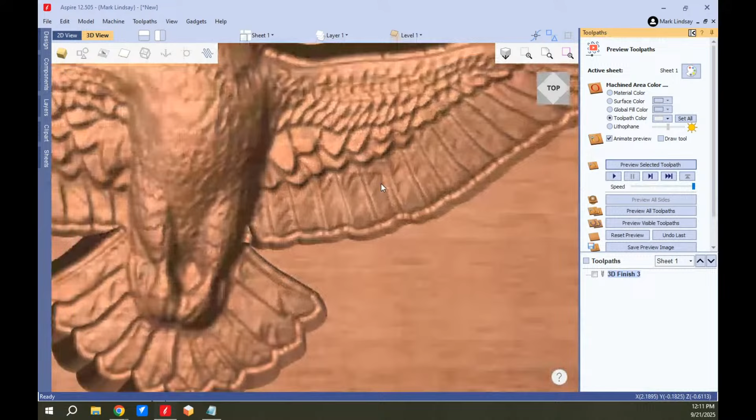All right, we're about there. Okay, we're finished. Now we can zoom in and we can see that tapered ball nose, it's done a fairly good job - it carved to that vector and then stopped.

So now what we need to do is cut this eagle out. We need to go ahead and do a profile toolpath, so for that I have the profile selected. Now I'll click on this. My cut depth is going to be the thickness of my material, and I'm going to use a 1/4 inch end mill because I don't have an 1/8 inch end mill that'll cut 3/4 of an inch deep.

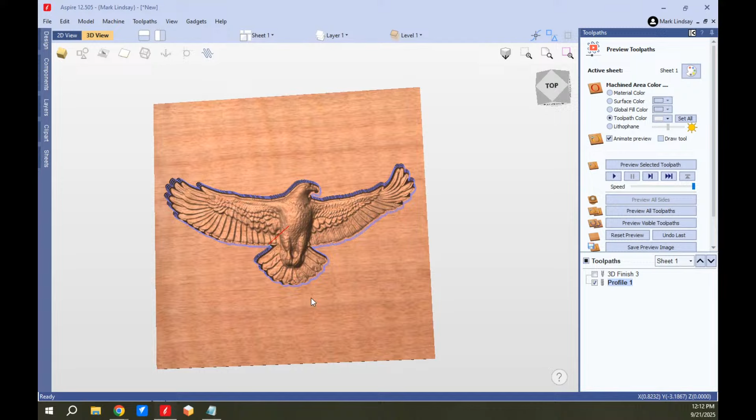And that's just for this demonstration. I'm not going to worry about any allowance offset or anything like that. I'm not going to do a separate last pass. I'm not going to add tabs. I'm just going to come down here and calculate it. All right, so we're all set to go. We'll go ahead and preview that.

And now I'll click on the waste material. Now let me zoom in here and we'll see what we have going on.

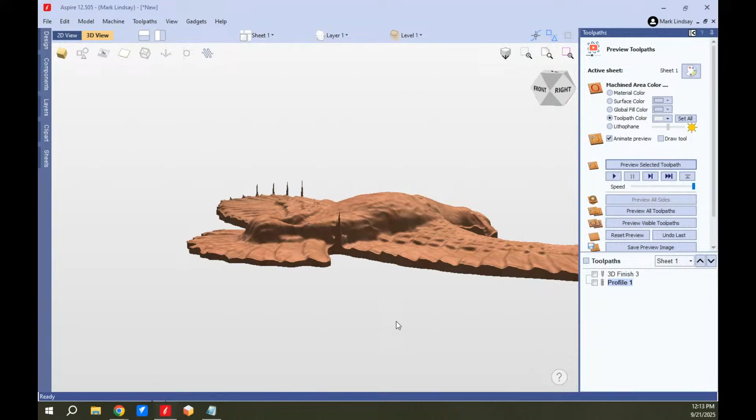What's happened here is that tapered ball nose has carved just to the edge of the model where that boundary vector was. And you can see we've also left a little bit of flash here, we've got some spikes pointing up. Now, some of that may have to do with the fact that I used an 1/8 inch ball nose to cut the model and a 1/4 inch bit to cut out the model. You can see here there's a little spot here that didn't get cut out. But also, if you look around here on the edges, you can see a little bit of flash, just a little bit of a ridge around the model that looks like it didn't get carved.

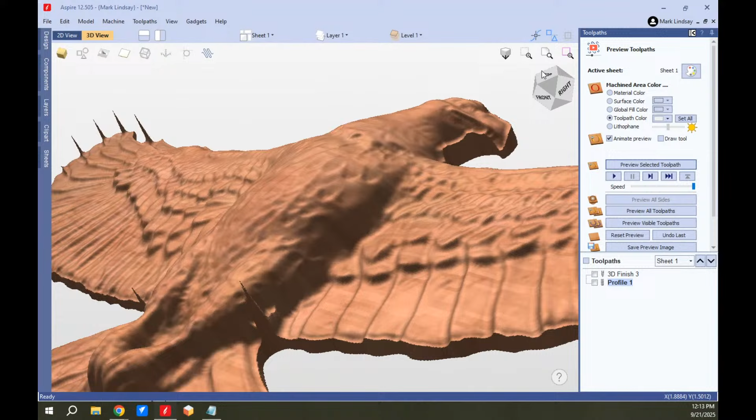So what we'll do, we'll go back to a straight top view, and I'm going to reset the preview. And the way I'm going to clean that up is with a boundary offset in my 3D finishing toolpath.

Now again, 3D roughing toolpath, this works exactly the same way. So let's go back into my 3D finishing toolpath. And right here we have a section called boundary offset. Now what a boundary offset is, it allows the bit to go past this boundary vector just enough to where it's carving all the way to the edge of the model.

So, okay, let's back up for just a second. When the software calculates a toolpath, all of the calculations begin with the center of the bit. All of this is calculated based on the center of that bit.

So it knows with a 1/8 inch tapered ball nose, wherever the center of that bit is, the cutting edge of that bit is half of the diameter of this bit. So it's actually stopping the tip of that bit, the center of that bit, in this case, 1/16 of an inch away from this border. And that's why you're getting that little bit of curved flash right here on the edge, because that's the radius of the bit that's carving this model.

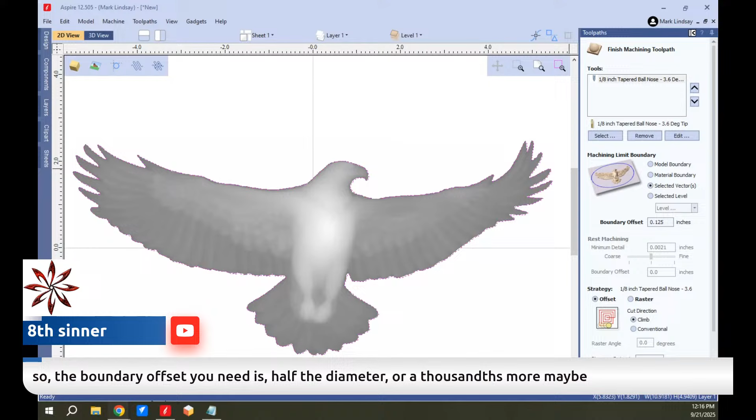The boundary offset is the diameter of the bit you're carving with. So if it's metric, if you're using a 3 millimeter bit, your boundary offset would be 3 millimeters. And again, it doesn't matter if you go offset or raster.

Let me go ahead and calculate this toolpath now that we're using the boundary offset, and we'll preview all of the toolpaths. It's only the 3D toolpath that has been changed and recalculated.

So that boundary offset is there to allow the bit to go past the edge of the model, past that vector, and allow it to cut the complete edge of the model. And you'll see it is carving, it's already carving wider than it did before.

And now we'll get rid of our waste. And now if I rock this eagle back a little bit, we can see I don't have that sharp, harsh edge anymore. That's all gone. I don't have those spikes sticking up. It's nice and clean.

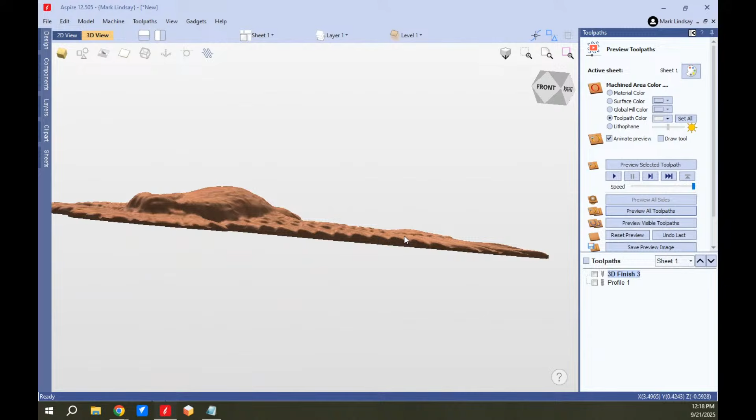That has got a nice smooth look. So...

8th sinner says this only takes effect on the outer edges. Yes, it only takes effect on the outer edges. Let me go back to the top.

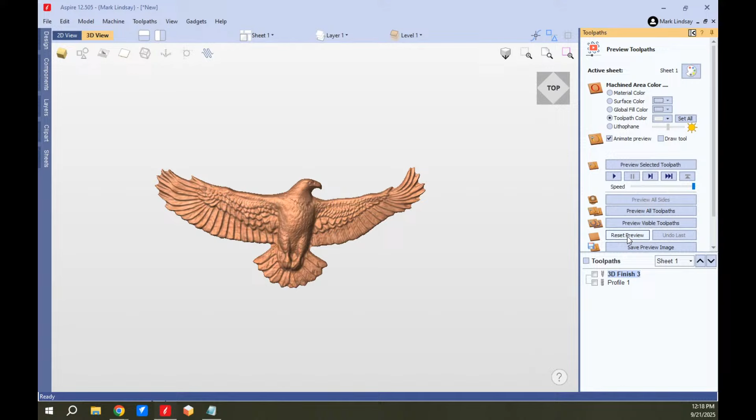I'm going to reset the preview, turn on the vectors here. I'm going to close this. And we can see the vector right here. If we look in the 2D view, we can see the vector. So if I click on this...

It's not going to give me a preview of that. Nope, it's not going to give me a preview of that. Okay, but if I click on the profile, it does give me the preview of the profile.

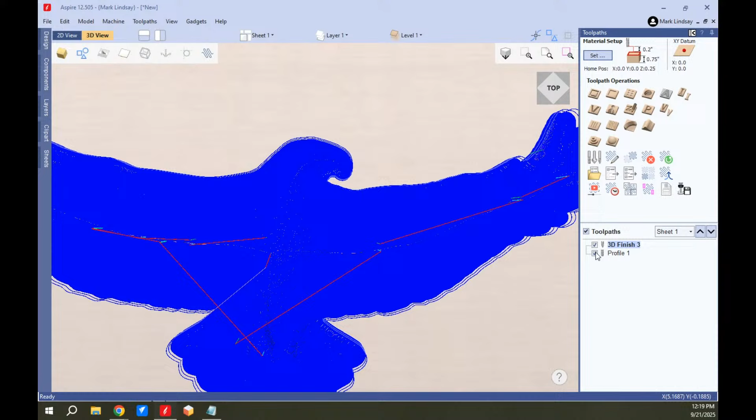Well, anyhow, if I turn on the 3D view, I have the vectors turned on, but you can't see it. Yes, you can, there we go. This is my border right there. That's my boundary. But this blue line out here, that's where the bit is coming to. The bit's going to come out this direction beyond this, allowing it to carve this edge of the model.

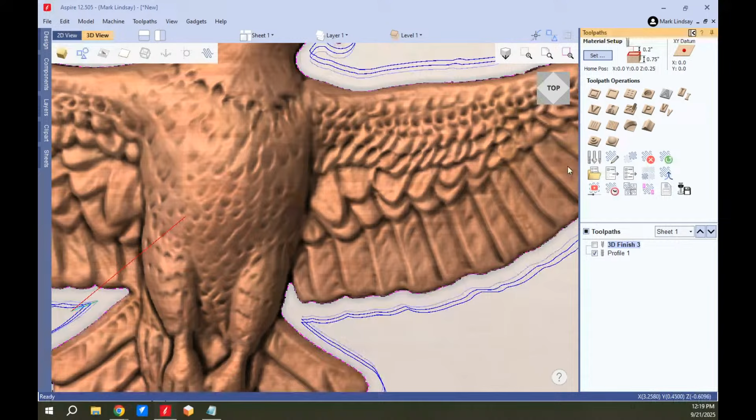So the boundary offset only affects the edges of the model. So that's what the boundary offset is. That's why it's used, that's how it's used.

And remember, it doesn't matter if it's the 3D roughing or the 3D finishing. For example, on the 3D roughing toolpath, I have a 1/4 inch end mill, my boundary offset is a 1/4 inch. On the 3D finishing toolpath, I'm using an 1/8 inch tapered ball nose. My boundary offset is an 1/8 of an inch.

So that is going to take care of all that flash, all those little spikes, and anything left over in a 3D carve. Now this is especially true in a model that is raised. It's less obvious if you're carving a dish, for example.

Let me add a sheet here. I'll add a new sheet, make it the same as this one. Double click to go into this sheet, and let's get into the clip art. And I'll do the eagle in a dish on this sheet. Hold down Shift just to increase the size a little bit from the center. Click off on there, there we go.

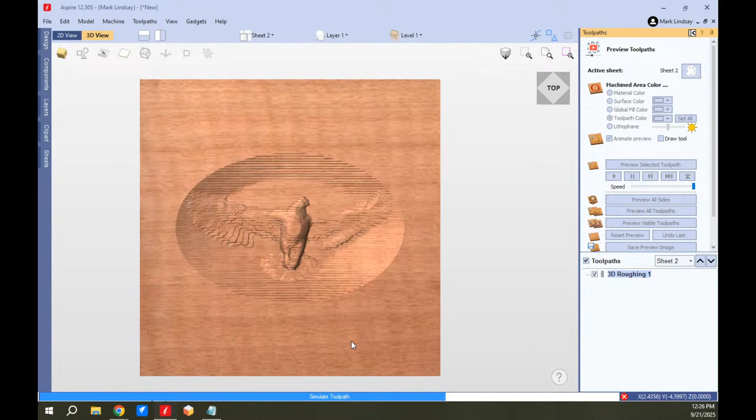And we can see it's taking a little bit more of a roundabout approach, but that's all right, doing it in several passes, just to remove most of the material here.

Okay, there we go. Now, because I didn't go into material setup and recess it 0.01, I have a flat spot in my model. Now that may or may not show up in the finishing toolpath, because I have 40 thousandths of an inch to play with here.

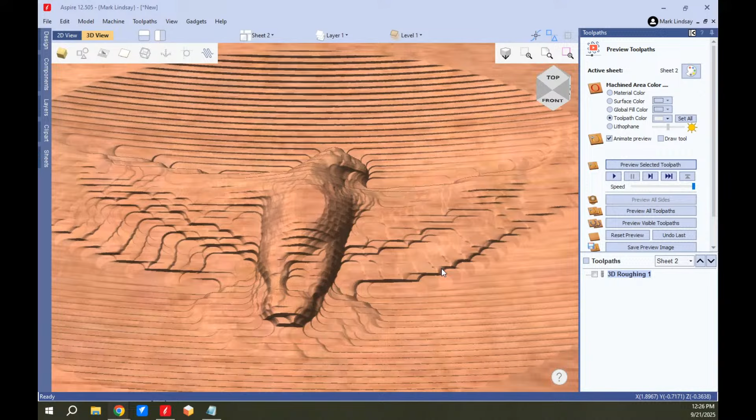Okay, so let's close this. And now we'll create our finishing toolpath using the selected vector with a boundary offset of 1/8 of an inch. And we'll calculate.

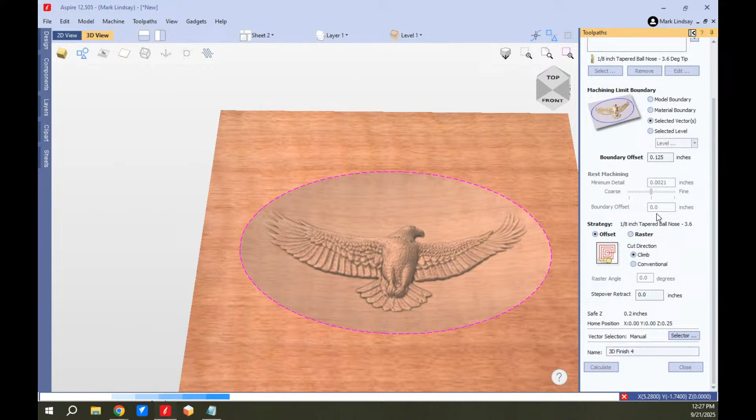Okay, now we see here this is the edge of this dish. But we see the bit's going to come out here as well. Let's take a look at what that means, and we'll preview that toolpath.

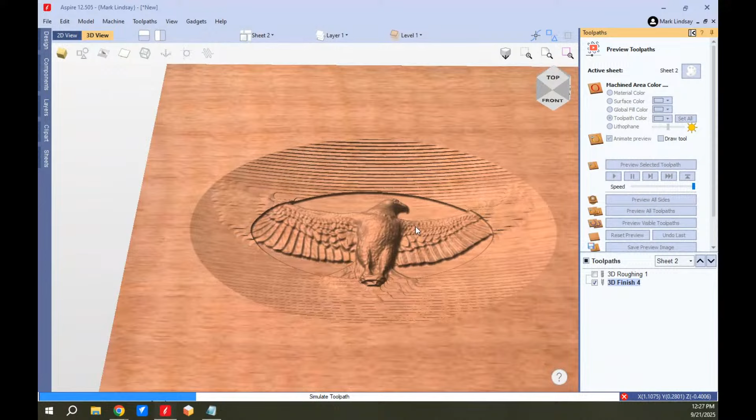And we can see that it's carving the entire thing. My flat spot is gone. But let's pay attention to what happens out here on the edges. The main advantage of using a boundary offset in either a roughing or finishing toolpath is it allows the bit to carve beyond the edge of the model.

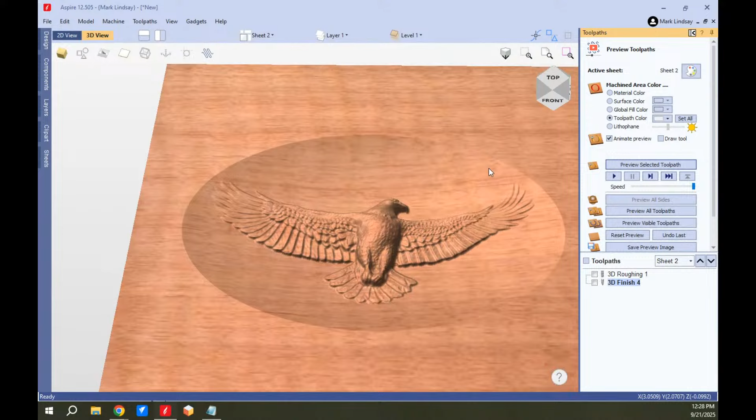Well, on a raised component, the edge of the model -- there we go -- it's a more dramatic appearance. On a dish, it's not.

So let's go to a straight down view and take a look. There's no evidence out here that that bit even carved out onto this surface, which is a good thing.

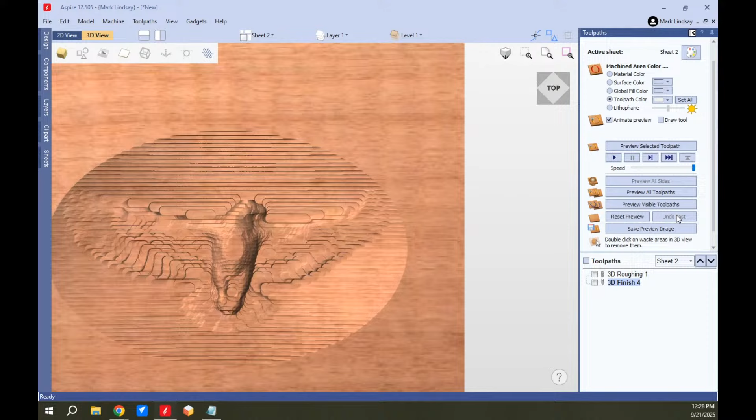Let's go back here, and I'm going to undo that. I'm going to go back into the finishing toolpath and remove that boundary offset, and let's see if it makes any difference in that appearance. Calculate.

All right, now we'll take a look at what this finishing toolpath looks like after, with no boundary offset.

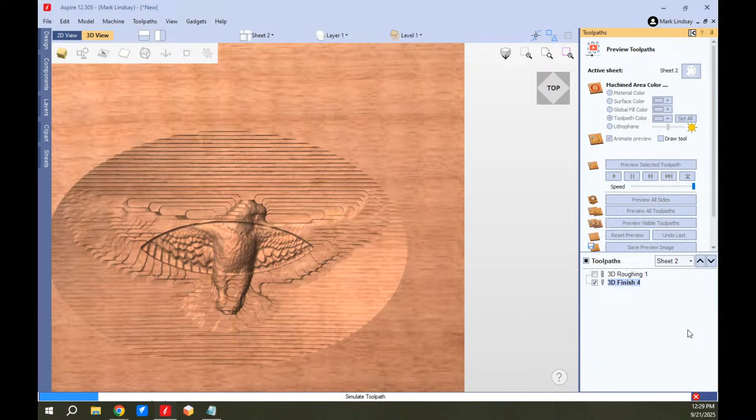Okay, David Hittenberger, the man who brought this entire thing up, asks: does the software use the 1/8 diameter or the diameter of the tapered bit at that depth of cut? That is, the tapered diameter is bigger than the tip -- which diameter does the software use? It uses the diameter of the tip that you have entered.

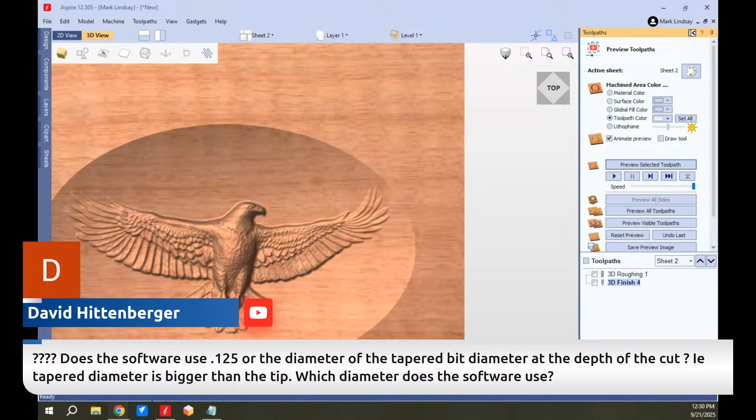It doesn't care if it's a 1/4 inch shank -- I'm using my hands like you can see. Let's say you have a 1/4 inch shank, but it's a tapered ball nose that goes down to 1/8 of an inch. The diameter it's going to use is that 1/8 of an inch. It's not going to take into account the larger cutting area within that taper. It's going to use the tip of the bit, the smaller diameter.

We look out here, there's no difference. So on a dish, using a boundary offset isn't strictly necessary. Let me close my preview here and go back into the 2D view. It's only on a model where the actual model is raised, and not within a dish, that a boundary offset is usually necessary.

In fact, if I'm doing any kind of a raised carving like this, and not something that's in a dish, I put in a boundary offset. It just cleans up so many things that I don't even bother trying without it. So on a raised model like this, use a boundary offset of the diameter of the bit you're carving with, be it roughing or finishing.

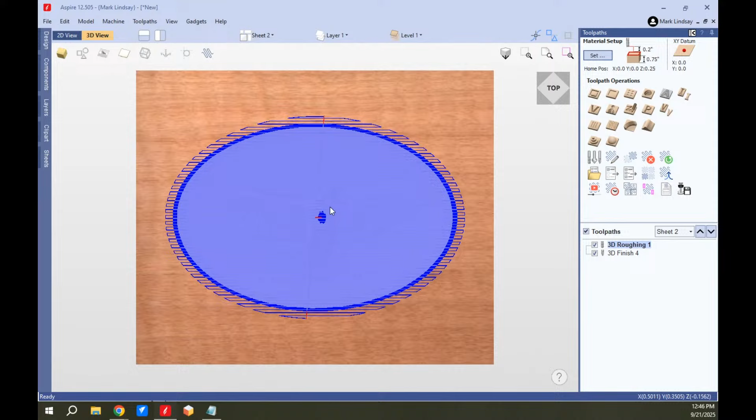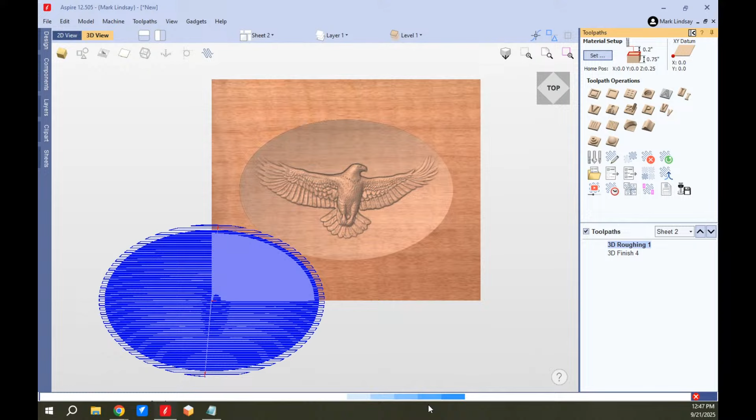Now if I go over to the other, it didn't tell me I need to recalculate either, because all of this takes place from the center of the toolpath, of the material. Now if I had changed, let's go into material setup, if I change my XY datum to the bottom left, now I need to recalculate. So do I want to recalculate now? Yes. And it's going to take a while, as you see. Okay, now it's recalculated. So if it does need to recalculate the toolpaths, it should always give you that message that the toolpaths need to be changed because the values have been changed.

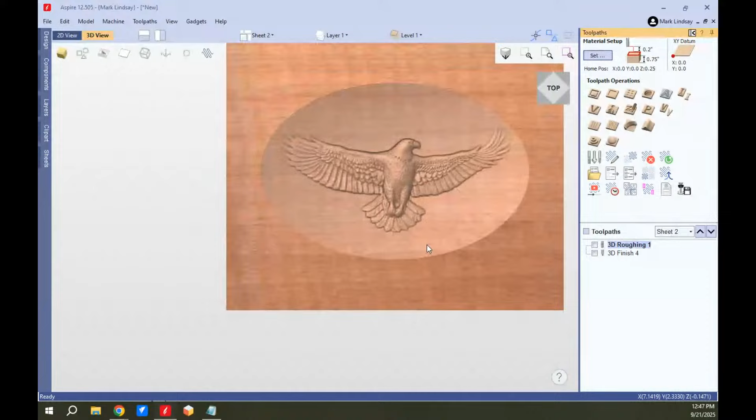The material values have been changed. Let's go back over here, back to the 2D view, jump out of here, and go into this one. And what am I going to do here? I'm going to change something. What do I want to change? I know, I'm going to job setup, and down here I will change my XY datum position to the bottom left from the center. Click OK. Now it has to recalculate the toolpaths because the way it was set before, the toolpath on the model was calculated from the center of the model. It's not anymore, now it's being calculated from down here. So yes, I have to recalculate them now.

Calculated, and now I come back over here and go into the 3D view, and there we are. So it will not always ask you to recalculate the toolpath if it doesn't need to. It will tell you to recalculate if it does need to.

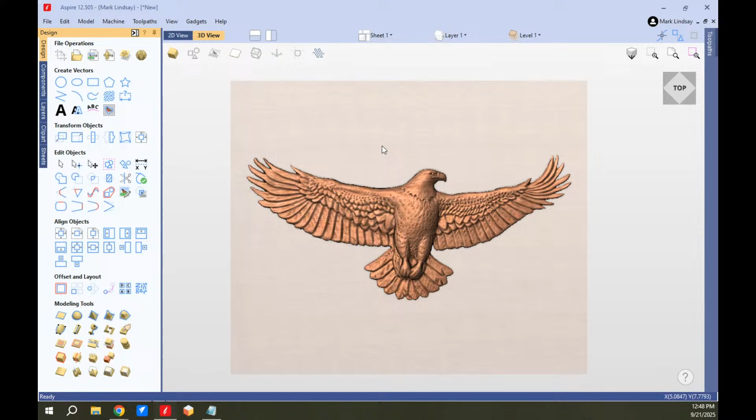Okay, so let's see here. Dwayne

Ruthig says also try not to save files to your desktop, only shortcuts to files. The desktop uses RAM. Yes, I agree with that. If you're storing a bunch of stuff on your desktop, that uses a lot of resources. Things on the desktop need to be accessible right now, real quick, so it keeps that file ready to open fast. But if you go into a folder and double click on a file there, the response is a little slower because it has to allocate those resources to open that file. Whereas on your desktop, it's already allocated constantly. So the more you have on your desktop, the more it tends to slow down your computer. Use a good file system and put things in folders. It's okay to have a shortcut to a folder you use a lot on your desktop, but things I don't need access to now are put away in a folder somewhere, usually on an external hard drive or SSD.

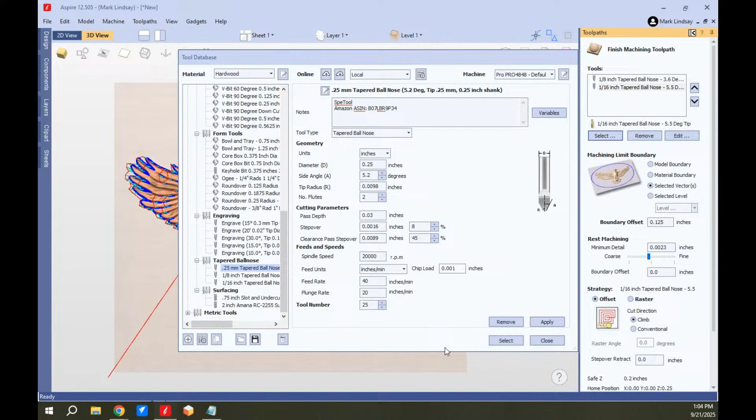So if I come in and select and add, now I'm going to add my 1/4 millimeter tapered ball nose, which is basically like a hypodermic needle. And I'm going to bring my detail down to 0.0023 of an inch. I calculate. I'm shooting for real long machine times too while I'm at it.

Will do, Mauricio. I will go check the comments over there. Pete's asking if I'm going to do a video on upgrading the new PC. I hadn't planned on it. No, I don't really see a need to, it's fairly simple and very straightforward.

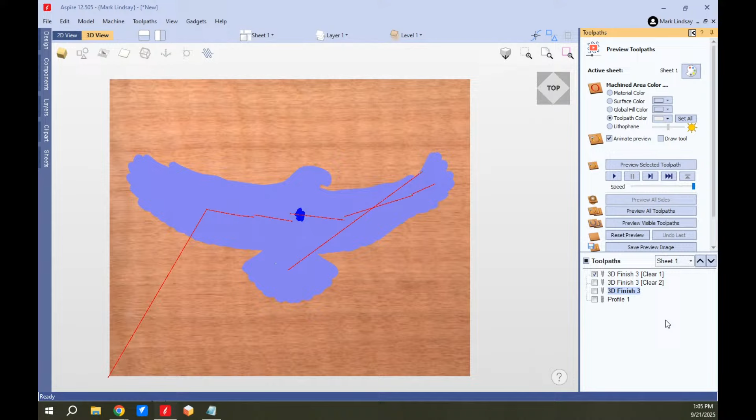Okay, so shut them all off here, and we're going to look at clearance 1, that is the 1/8 inch ball nose. Turn that off. Clearance 2, that is the 1/16 inch ball nose that's going to get in and carve everything the 1/8 inch ball nose couldn't reach. Turn that off and turn this on, that's the 1/4 of a millimeter bit that's going to come in and get the details that none of the other two could get to.

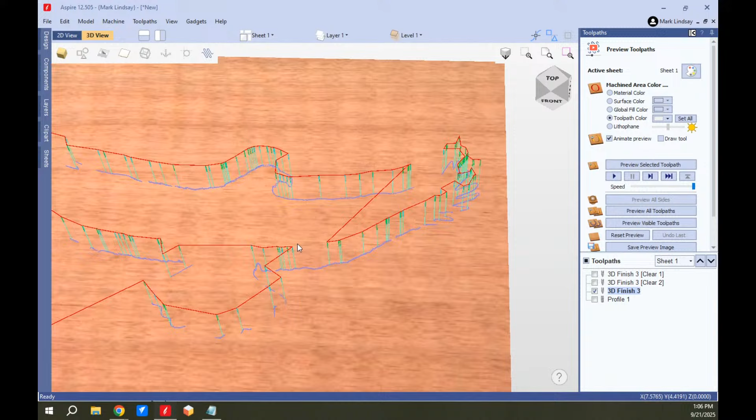Now I'm just curious as heck. Let's do these in order, and we're going to preview those 3 visible toolpaths. This is going to be intriguing. Now we see that the 1/8 inch bit is carving the majority of that model.

See what happens here. I'm kind of eager to see what details that last bit's going to do, because it doesn't look like it's going to do much of the model at all. But you notice my boundary offset didn't change, it stayed the same for all 3 bits.

The boundary offset is the diameter of the largest bit. You can just barely see that 1/16 of an inch end mill doing a little bit of detail work on the feathers and around the eyeball. And now that 1/4 millimeter bit coming in to do a little bit around the feathers. Now that's purty.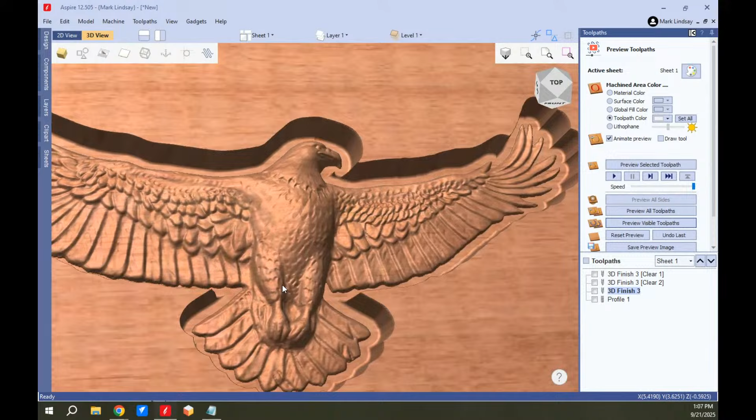Now, just for giggles, I'm going to change the bit on this profile. I'm going to go to an 1/8 inch end mill, and let's see what we get. I don't really have an 1/8 inch end mill that'll reach this deep, but for demonstration purposes I can fake it. That's going to get in there a lot closer.

Now we'll preview that toolpath. That's a pretty eagle, I tell you what. Still got a little bit of flash there, but that's easily cleaned up with some sandpaper. A little bit right there as well, but that's easily cleaned up with some sandpaper. I can get that real fast, I have files and rasps that'll take care of that. Man, that's pretty good, actually.

All right, so that's basically what REST machining is. It is simply carving away any of the material that the larger of the bits you add won't reach. And it's great for getting detail, but as you can see with that 1/4 millimeter bit, the difference is so tiny. All you're basically doing is adding to machining time.

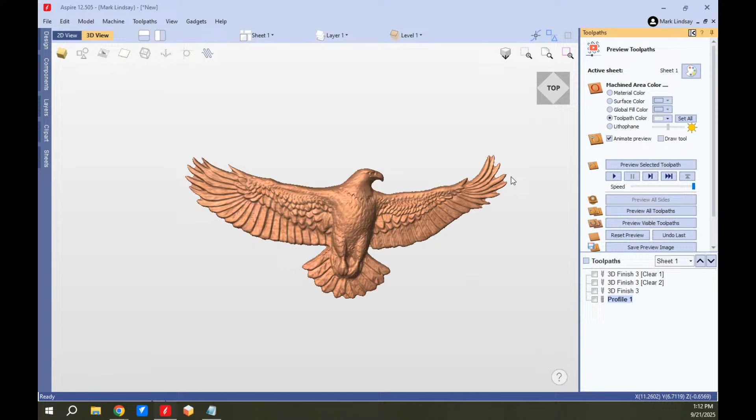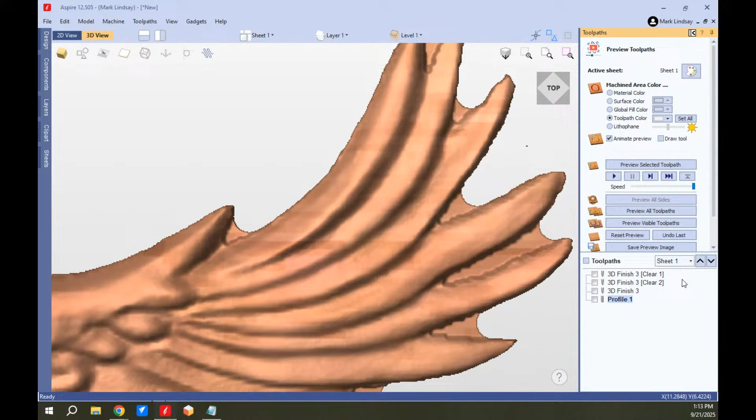David Hittenberger says, use a tapered ball nose for the profile, pros and cons. Well, the obvious pros are, depending upon the diameter, it would be easier for it to get down into those real tiny spots. Let's bring this back over here, undraw that, and go back into preview. The tapered ball nose, again depending on diameter, might be able to get in here and cut these little webbed areas out. The problem is, it's going to have to remember to stay out here so that the tapered portion of the end mill doesn't cut into the model too. So it may work, it may not. The pro is it may be able to get into that tight area. The con is it may cut into the model, or it may not cut in as much as you think.

Pete says, have to remember to copy fonts over too. I will not be doing that. The reason is I have too many fonts on this computer. I have about half as many on my main design computer, and when that comes out here I'll obviously be using that. But the number of fonts will be severely limited on my main design computer. I am not going to go crazy on fonts like I did on this computer.

This used to be my main design computer, and it's a gaming PC, an HP Omen gaming PC. But I went absolutely crazy downloading and installing fonts, because I demonstrate a lot of stuff, but I also added fonts just because I liked them, just because I thought they were cool. And I have way too many fonts on this computer.

So I utilized restraint on the main design computer, and I add fonts as I need them, not just to have them. I find the number of fonts tends to be more of a hindrance than a benefit. Having a lot of fonts to choose from slows down the work, because not only do you have the extra time it takes for the software to load all those fonts when you go into text mode, but you also have the decision making process.